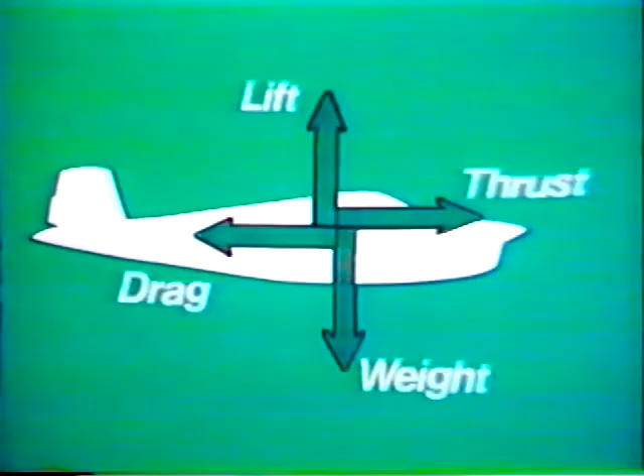In this first tape, I will revisit with you some of the areas you studied when you were first learning to fly. We will discuss the atmosphere, its composition, and its properties of pressure, density, and viscosity. Next, we will examine the 4 forces which act upon an aircraft in flight. We will look at an airfoil, name its parts, and establish terminology important to understanding the generation of lift, such as angle of attack, camber, angle of incidence, and chord line.

The principles and laws of Bernoulli will be explored along with the theory of circulation. As a result of this, the relationships among camber, relative wind, and angle of attack should be well established in your mind.

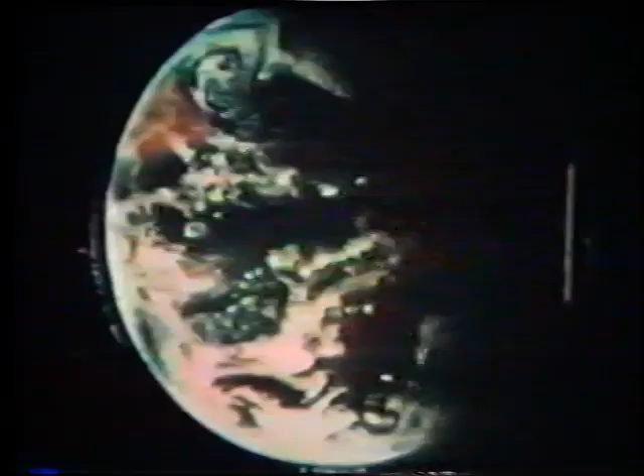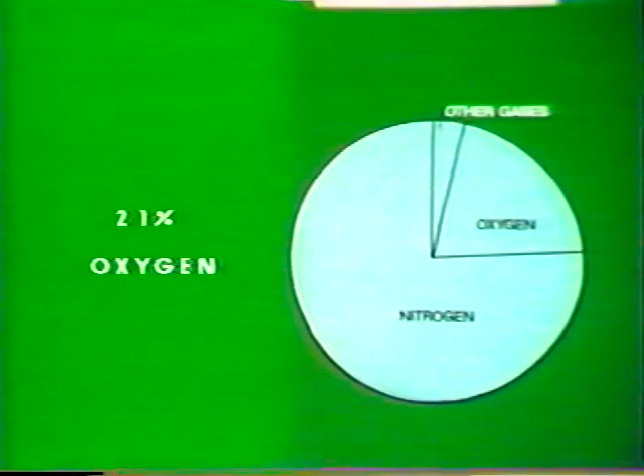Except for scientists who study it or environmentalists concerned about its quality, most people give little thought to the air which surrounds them. But if you're counting on it supporting you immediately after rotation from the runway, you should reacquaint yourself with it. Almost everyone remembers that dry air is 78% nitrogen, 21% oxygen, and 1% other gases. The ratio of these gases remain the same around the world and as high as the atmosphere extends.

Water vapor is also a gas found in the atmosphere. Its quantity may vary, unlike the other gases whose ratio is pretty well constant. It may make up from near 0% of the atmosphere to a maximum of about 5%. As the amount of water vapor increases at a given point, all other gases are reduced proportionately.

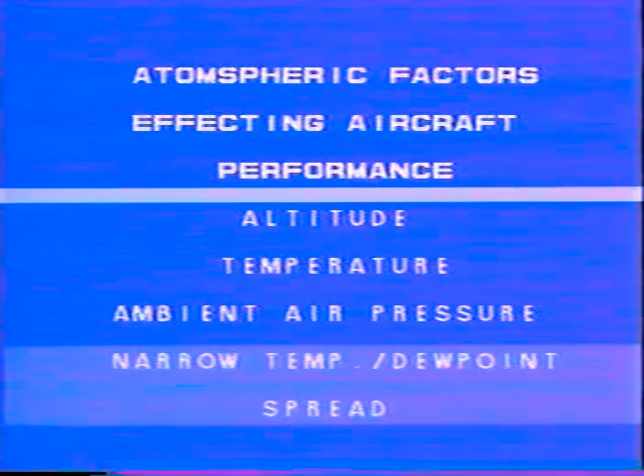Most of us probably know that air is a gas, and as such has all the properties of gases. It has mass and weight. It can exert pressure, and can be compressed or diffused, causing changes in its density. And it offers resistance to objects moving through it. All of these properties are at work when you fly your plane through the atmosphere.

Let's first look at the words static pressure. Remember the 14.7 pounds per square inch you learned in junior high school science? That was supposed to be the normal air pressure. That is static pressure. You probably remember a specific number without any qualifications. However, the figure is an arbitrary one and only pertains to sea level on a, quote, standard day, unquote.

If you went to school in North Platte, Nebraska, the figure that you learned as normal air pressure was about 1.5 pounds per square inch off. Air pressure on a standard day in North Platte is more like 13.2 pounds per square inch.

Static pressure, then, is the force exerted by the weight of the atmosphere pressing down from hundreds of miles in space. It is pressing down because it has mass and is reacting to the pull of gravity. If that is so, why isn't the pressure equal regardless of the altitude? Why does North Platte, at a little over 2,800 feet, have over a pound of pressure less than at sea level? One of the other properties of air helps us to explain it.

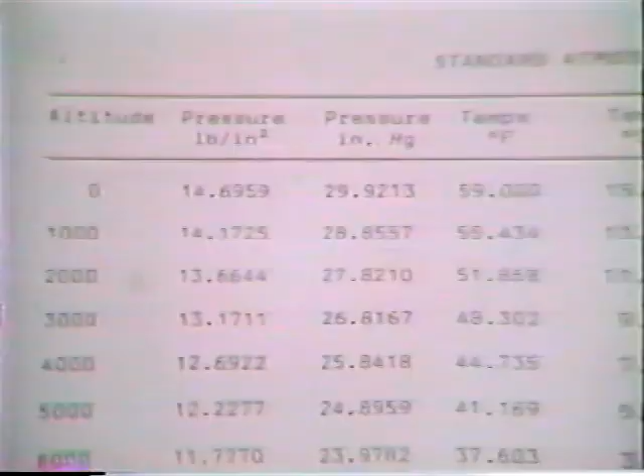Let's take a look at a chart which represents a standard day, one of those we mentioned earlier. This illustration is an excerpt, not the complete chart, which was originally put together by the National Advisory Committee for Aeronautics, the predecessor to NASA. The chart is based on many years of weather observations and has since been confirmed as basically accurate. Its purpose is to provide a common denominator for measuring aircraft performance and a standard upon which to calibrate and correct aircraft instrument readings. This chart will be important when we discuss aircraft performance and instruments.

Before dealing specifically with any one of them, let's take a moment to review the 4 forces acting on an airplane in flight. You know them as thrust, drag, lift, and weight, or gravity as some prefer to call it. The 2 forces constantly trying to bring you to a stop on the ground are drag and gravity. The 2 forces you must produce to overcome these negative forces are thrust and lift. Thrust must overcome drag, and lift must overcome gravity before the plane can get off the ground.

In a stabilized flight condition, such as level flight, climb, or descent at constant velocity, thrust and drag are equal, and lift and weight are equal. The propeller produces a given thrust, but total drag equals that thrust and limits the aircraft's speed. The weight of the plane, plus a little extra aerodynamic weight, is equaled by the lift produced over the wings. In aerodynamics, this stable condition is known as equilibrium.

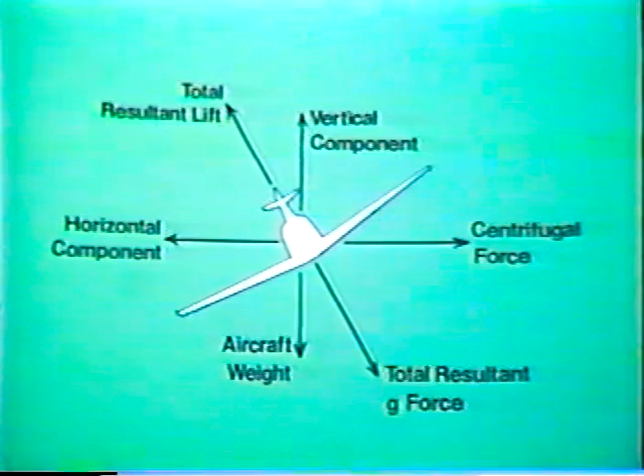Now we come to the big question: what is lift, and how is it produced? Before we get the answer, let's look at some pictures and review some more terms.

An airfoil is any part of the plane shaped so that it responds to air movement by producing differential pressure on either side of the airfoil. The wing, propeller, and empennage are the important airfoils.

Leading and trailing edges of the wings seem pretty obvious, but they do more than just outline the silhouette of a wing. Their location has much to do with the aerodynamics of an airfoil. A line connecting the leading and trailing edges of an airfoil is referred to as the chord line. It should not be thought of as a permanently anchored thing, since it moves as the high lift devices change the shape of the wings. Its position in relation to the relative wind and the longitudinal axis of the aircraft are extremely important.

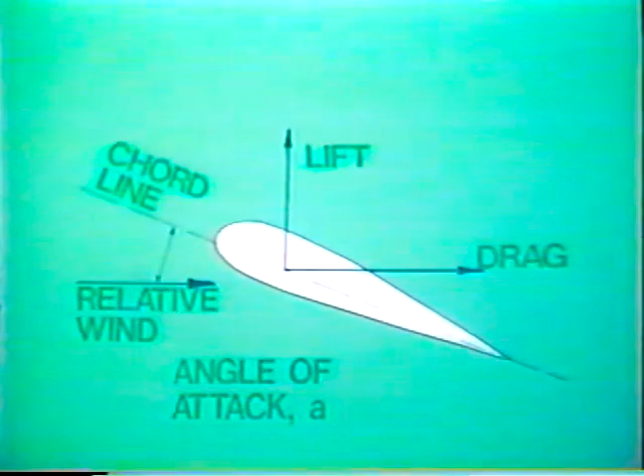Camber means curving or bending. On an airplane, it refers to the curving surfaces. A wing which has identical curvature top and bottom is known as a symmetrical wing. An asymmetrical wing usually has a flatter lower surface with more curvature on top.

Relative wind is the airstream created by the movement of the plane through the air. Most of the time its direction is opposite the flight path of the aircraft, but it may be deflected by gustiness or wind shear. Angle of attack is the angle between the relative wind and the chord line of an airfoil. Increasing the angle of attack will increase lift and also drag. It also determines the point at which a wing will stall. A given wing will always stall at the same angle of attack, regardless of speed or attitude.

It is rare that a manufacturer fits a wing to an airplane so that its chord line is parallel to the longitudinal axis of the plane. In normal cruise flight, they want the fuselage to be parallel to the ground, but it must be able to support maximum gross weight at the same time. Therefore, the wing is set into the plane at what is called the angle of incidence. This provides just enough angle of attack so that the pilot should not have to trim beyond a neutral position.

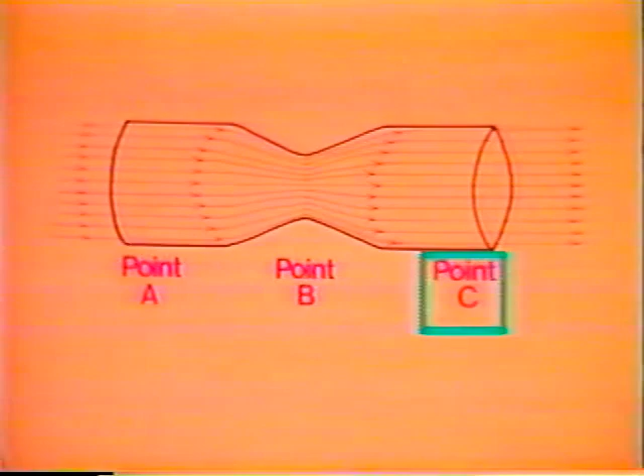The law of the conservation of energy requires that total energy in the tube remain the same. Therefore, we have taken from the potential energy to create some kinetic energy. Since potential energy was represented by static pressure, we have reduced the static pressure by using some of its potential energy to create greater velocity at the restriction at point B. After the airflow passes the restriction at point B, its velocity decreases and the pressure increases. If the velocity at point A and C are the same, then the pressure would be identical.

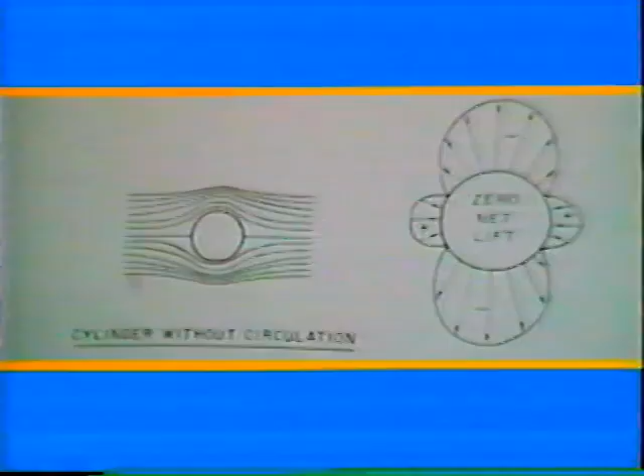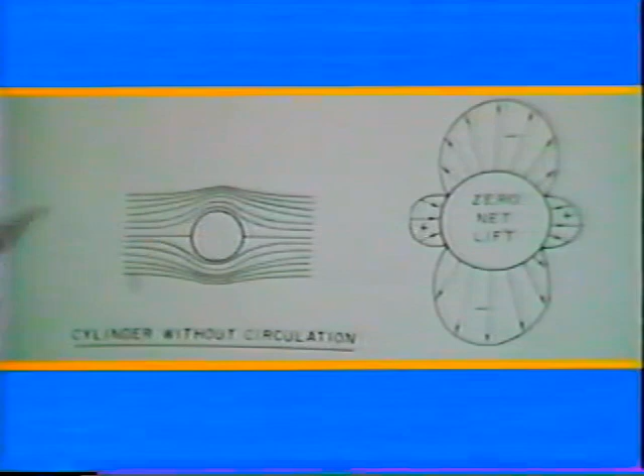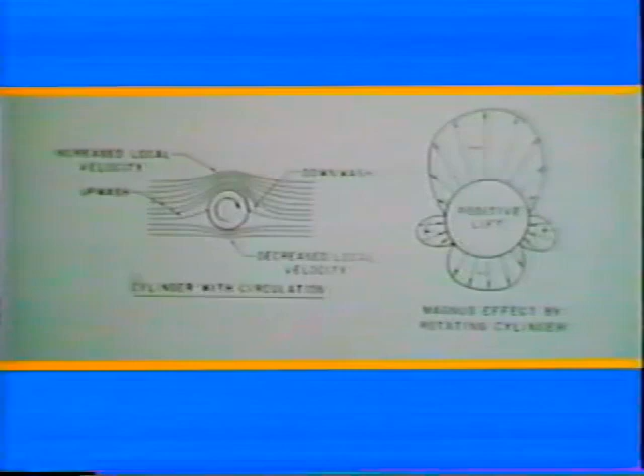Another important concept in the generation of lift is circulation. If you are a baseball fan, you have probably seen its effect on a pitched fastball. Look at this diagram of a cylinder and an airflow. We will ignore density and viscosity at this point. Note the pattern first where the cylinder is stationary, and in the second illustration where the cylinder is rotating. The circulation of the cylinder has produced not only a larger amount of lift on its top side, but it has also produced an upwash ahead of the cylinder and has moved the stagnation points toward the bottom.

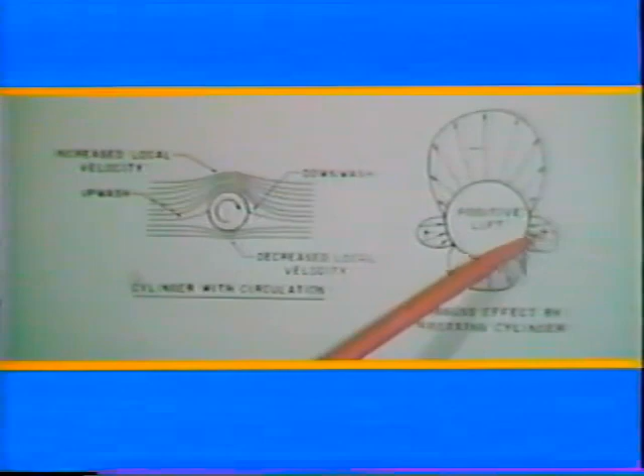There are normally two stagnation points on an airfoil. They occur along the leading and trailing edges of an object placed into an airstream. At the leading edge, where the air separates to go either above or below, a small area exists where there is no air movement. At this point, a stagnation pressure develops, which is the sum of the ambient pressure ahead of the wing and the dynamic pressure around the wing. A similar area occurs along the trailing edge of the airfoil.

Apply this concept to baseball. The pitcher puts some backspin on the ball as he throws. The highest velocity exists over the top of the ball, creating lower pressure there than on the bottom. This lifts the ball. It actually bobs up from the plane in which it was thrown.

And if it's a good fastball, the batter will undercut it completely.

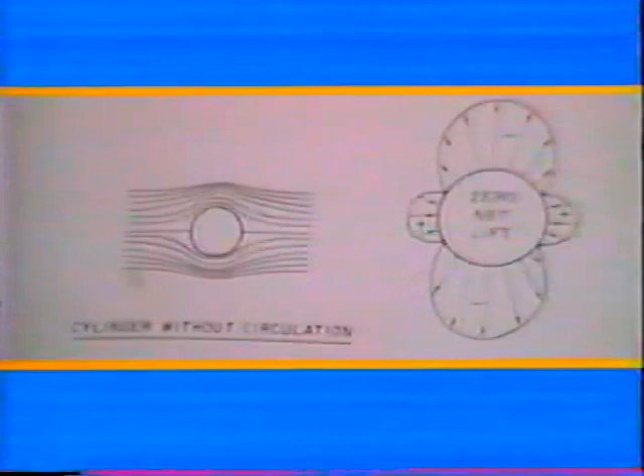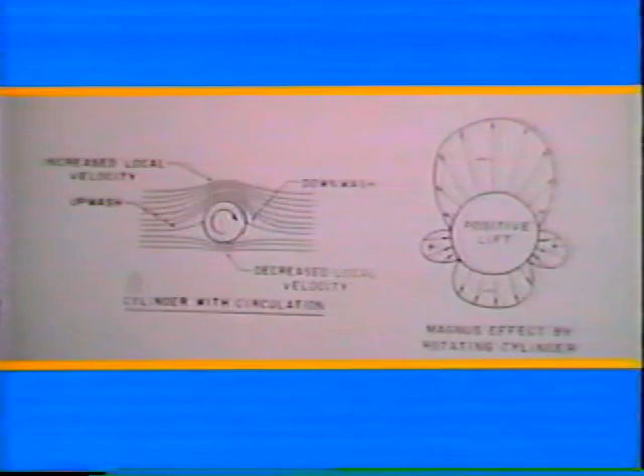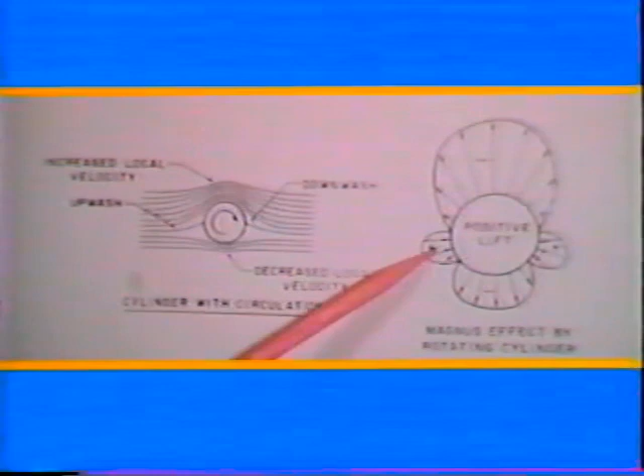Now look at the diagram where the cylinder has been placed in rotation. Lift forces on the top, where velocity is greatest, has increased, while the opposite is true on the bottom. The stagnation points have moved to a lower position. The net result is a positive force acting perpendicular and upward from the cylinder.

The position of stagnation points is of additional importance to you. It is the leading edge stagnation point that has the area where ice formations start. Because of the stagnant air at this point, the ice sometimes develops almost a horn shape, which continues to build out beyond the stagnation area under some circumstances.

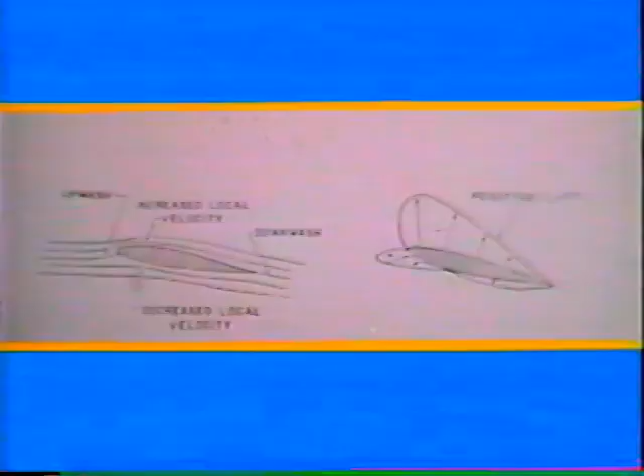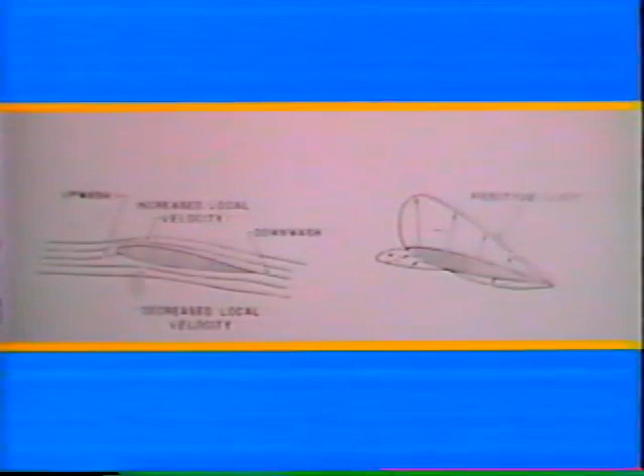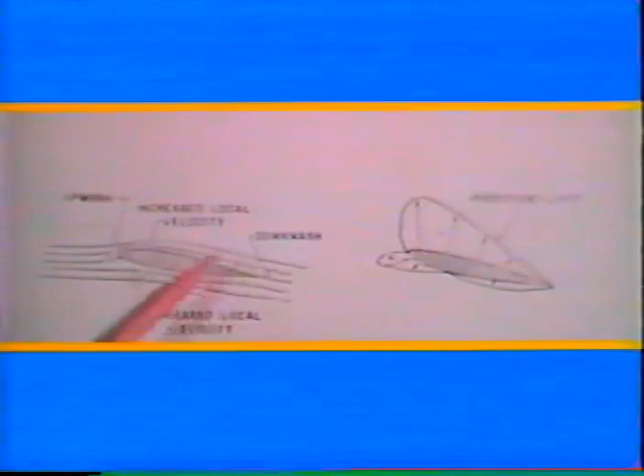The symmetrical airfoil, tilted to a positive angle of attack, shows very similar pressure patterns. Note also the upwash ahead of the airfoil and the downwash behind the trailing edge. The airfoil appears to have the same circulation around it as does the circulating cylinder. This helps explain why velocity of the airstream over the wing accelerates as the wing is placed in motion. It is subject to the same type of circulation.

One more observation deserves our consideration. The symmetrical airfoil at small angles of attack may develop negative air pressure both top and bottom. It will be true, however, that the least pressure will still be on the top of the wing.

It is also true that at high angles of attack, the pressure on the surface will be increased. It will force large quantities of air down in the downwash coming from the airflow over the top of the wing. In this situation, up to one third of the lift force may come from the increase in pressure.

So far, I have presented you with three important concepts on the production of lift. First, the Bernoulli principle utilizes the theory of conservation of energy, and it explains why air placed in motion over an airfoil reduces the pressure.

Second, the theory of circulation helps us to understand why the velocity of air flowing over the wing is greater than that flowing beneath the wing. Third is Newton's third law, which states that there must be a reaction for every action. We know that large quantities of air are forced downward behind the trailing edge of the wing. If we force air downward, the reaction in nature is to force the wing up.

Now that we know why lift is produced over the wing, let's take a look at how engineers determine the amount of force produced by this phenomena. It will involve a mathematical equation, but not one that you should find very intimidating.

The formula for lift looks like this. Lift equals the coefficient of lift times one half of the density times the velocity squared times the wing surface area. All of the items seem obvious except coefficient of lift. This item is an index number representing the ratio between lift pressure and dynamic pressure.

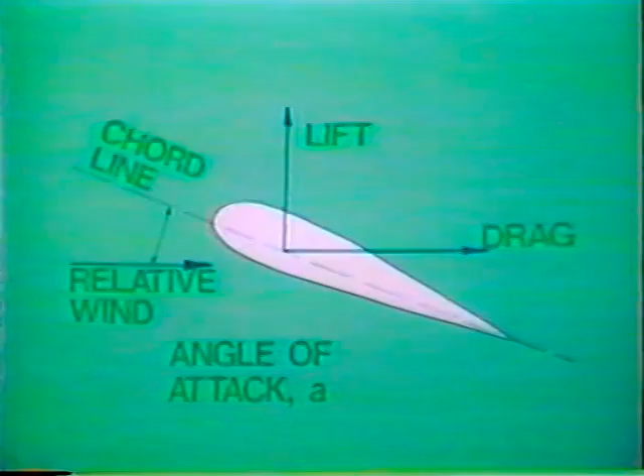It is related to the shape of the wing, and the angle of attack. The maximum lift coefficient for any wing occurs at the point of the stall. We know that a wing will always stall at the same angle of attack. We therefore reach the maximum coefficient and the stall angle of attack at the same time. This has implications for landings and takeoffs.

For illustrative purposes, let's place two aircraft on a runway side by side. All factors are equal except the maximum coefficient of lift. Airplane A has a maximum coefficient of lift of 1.8 with a thick asymmetrical wing, while B has a thin symmetrical wing with a coefficient of 1.0. Which plane will use less runway for its landing and takeoff? It will be the aircraft with the highest maximum coefficient of lift, or in this case, aircraft A.

Now, would it be possible to modify airplane B without changing to another airfoil and be able to equal the landing and takeoff performance of airplane A? Yes, it would. We could cut loose a section of the wing at the trailing edge and hinge it so it would kind of droop down. Why don't we call it a flap?

Since shape is considered in our index, we bend the flap down until we get a camber which will be equal to 1.8 as its maximum coefficient of lift at the maximum angle of attack. Now, we can use the same landing and takeoff figures for both aircraft.

We can retract the flaps while in cruise and have the benefit of a cleaner airfoil with less drag. The lowered coefficient of lift will be compensated for by increased speed.

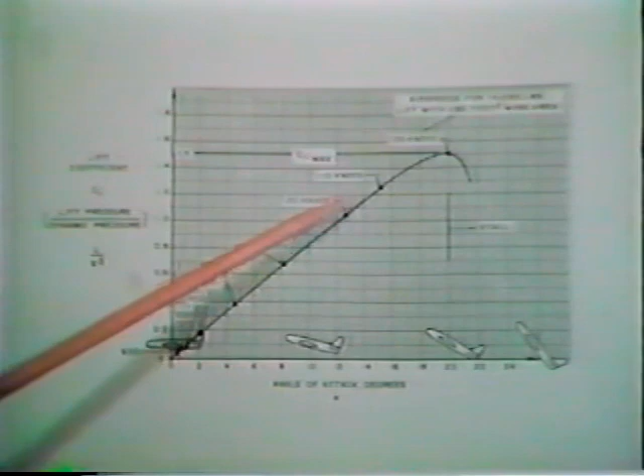This chart was taken from Aerodynamics for Naval Aviators. It shows that the coefficient of lift varies directly with the angle of attack. How is it possible that a diminishing angle of attack and a lower coefficient of lift can keep an aircraft in the air? The answer is your airspeed.

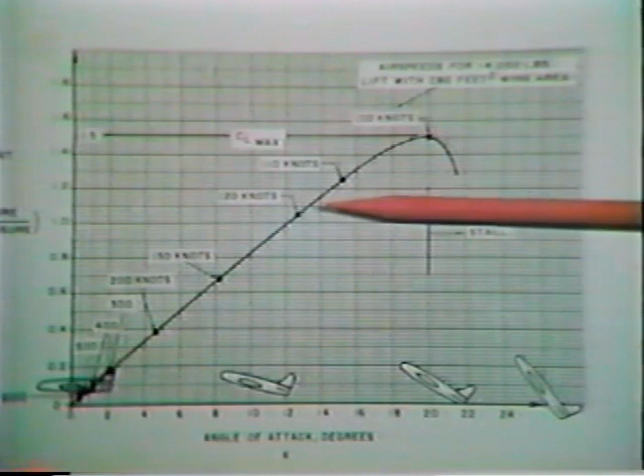Note on the line, which correlates index numbers and angle of attack, that selected airspeeds are also given. You will find that as the angle of attack and the coefficient of lift diminish, the airspeed increases.

Many instructors use this information to demonstrate that control of airspeed is primarily a function of angle of attack. They further claim that power is used to control altitude. Although discussions on this topic have appeared in the journals from time to time, it is well accepted that attitude controls airspeed and power controls altitude.

Well, we ought to regroup here for a moment. We have just determined that there are basically three things which determine how much lift you will get over your wings. They are relative wind, angle of attack, and camber. They are interrelated so that what affects one has an effect on another.

For example, let's take a plane in straight and level flight. If we retarded the throttle and began to lose altitude, you would automatically adjust the angle of attack if you wish to remain in level flight. This would reduce your airspeed, but by increasing the angle of attack, you have increased the coefficient of lift, which gave you the lifting force you need to remain at a given altitude.

There have been many pilots who have lost airplanes because they didn't understand this relationship. Take the full flap go-around as an example. Cleaning up flaps means reducing the coefficient of lift to that of a clean wing. Getting rid of flaps all at once without giving the plane a chance to accelerate and compensate for this loss may mean a stall and loss of altitude at a crucial point.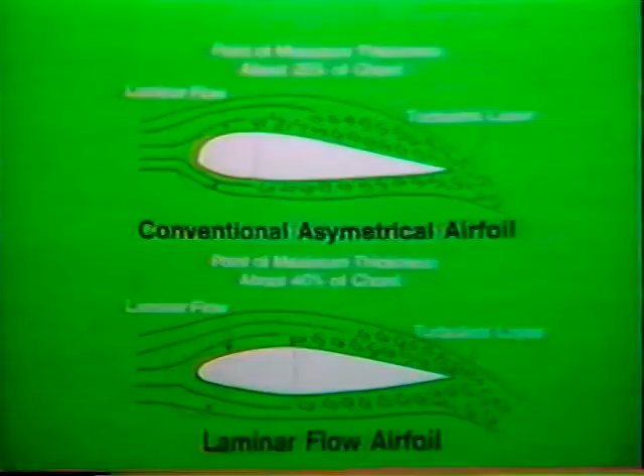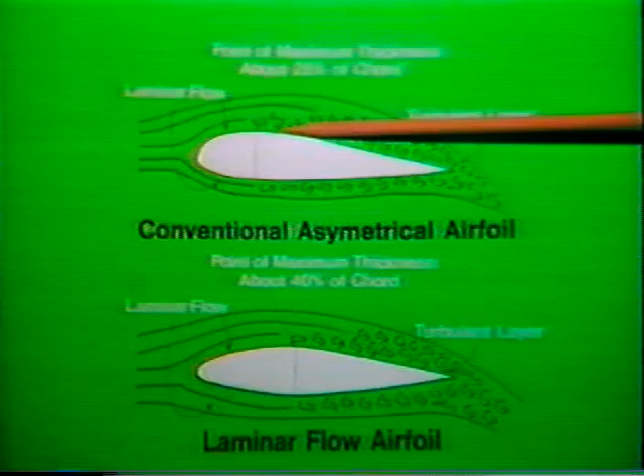Somewhere behind the point of maximum thickness of the camber, the airstream cannot hold to its smooth boundary layer. It becomes turbulent. As long as it has a strong enough velocity, it will remain layered. Stagnation pressure from the trailing edge of the wing is quite powerful. The velocity of the turbulent layer diminishes as it nears the trailing edge, and the airflow along the wing may actually reverse direction due to the trailing edge stagnation pressure.

What would cause the turbulent layer to lose velocity? When the angle of attack is increased, it becomes more difficult for the boundary layer to cling. The circulation effect produces an upwash at too great an angle over the leading edge. This allows the turbulence layer to spread toward the leading edge. Because it is turbulent, its velocity is decreased, and the trailing edge stagnation pressure amplifies the airflow separation.

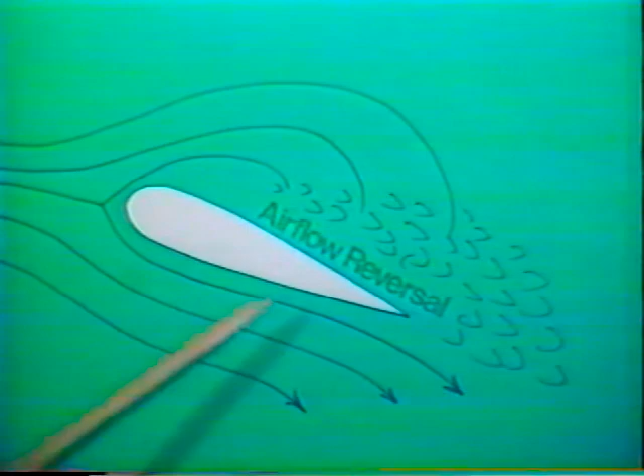At the stall angle of attack, this separation is complete. All you have left to keep you in the air is the downward deflection of the air from the bottom of the wing.

Unfortunately, some training manuals leave you with just the images of the wing sections and their airflow patterns. Well, a wing just doesn't behave that way most of the time.

First, it is designed so that its stall pattern follows a known progression. A well-designed wing will stall first at the trailing edge near the wing root. Except for T-tail aircraft, this places the tail surfaces in turbulent downwash, which produces the buffeting that is your warning of an impending stall. It also leaves the tips to stall last, giving some degree of aileron control up to complete stall, and helps prevent nasty wing drops that could happen if the tips stalled first. Your wing may still be flying when the stall breaks.

The reason the nose falls through the horizon with suddenness is that there is a complete stall close to the fuselage, which eliminates the downwash over the horizontal stabilizer. Your plane depends on that downforce to balance a nose-down pitch built into it at the factory. With the tail force gone, the pitch force takes over and drops the nose.

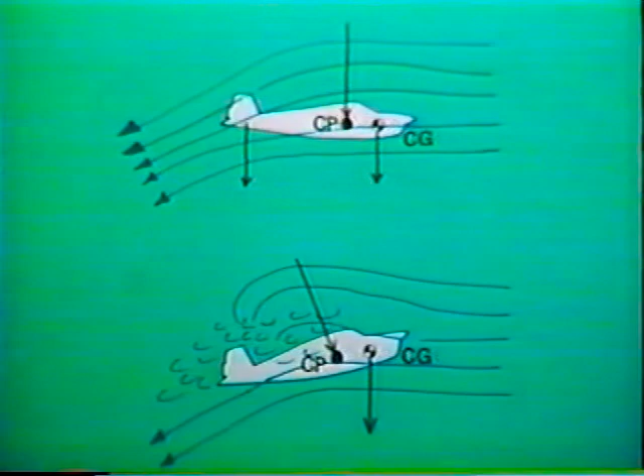By stalling the wing root area first and having the stall progress outward from the fuselage, the pilot is given a warning of an impending stall. The nose will automatically pitch downward toward recovery, and aileron control will exist well into the stall, but not after a complete stall.

The way designers get the wing root to stall first is usually to twist the wing by giving it a smaller angle of incidence at the tip than at the root. It's only a matter of a couple degrees, but it does the job. It's also possible that the airfoil near the tip is a different shape than the airfoil in the main wing section. If the coefficient of lift is higher at the tips, the tips will remain flying after the main wing has stalled.

Another technique for inducing root stall first is to place a small triangular strip on the leading edge near the wing root. At high angles of attack, these strips disrupt the smooth airflow over the wing enough to induce early airflow separation and initiate the stall at that point.

A point worth repeating concerning stalls is that they can occur in any aircraft attitude and at any airspeed. A snap roll at the top of a loop when the plane is inverted is a stall maneuver. High-altitude aircraft cruising just under Mach 1 have stalled in clear air and fallen thousands of feet before recovery.

The angle of attack at which a given airplane will stall is always the same. Your stall warning device is set to trigger at a few degrees below the stall angle of attack. Remember that the next time you make a tight turn from base onto final, believing that just a little extra airspeed will compensate for the higher angle of attack needed to support the airplane.

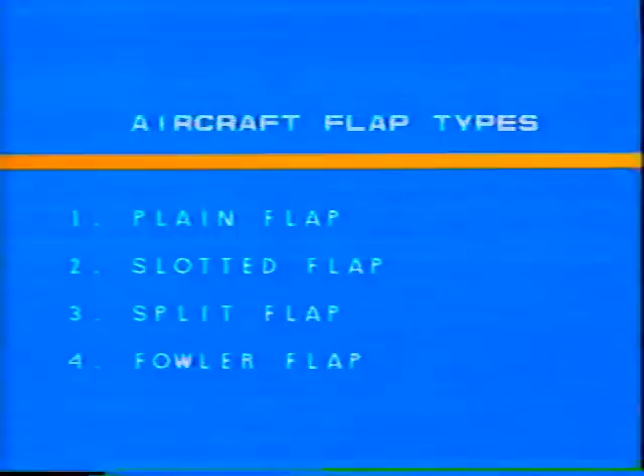Modern aircraft are equipped with any of four types of flaps: the plain flap, slotted flap, split flap, and Fowler flap. Their primary purpose is to allow for steeper landing approaches by increasing the coefficients of lift and drag.

Many general aviation aircraft use a version of the plain flap, which is essentially a section of the trailing edge which can droop to, say, around 40 degrees.

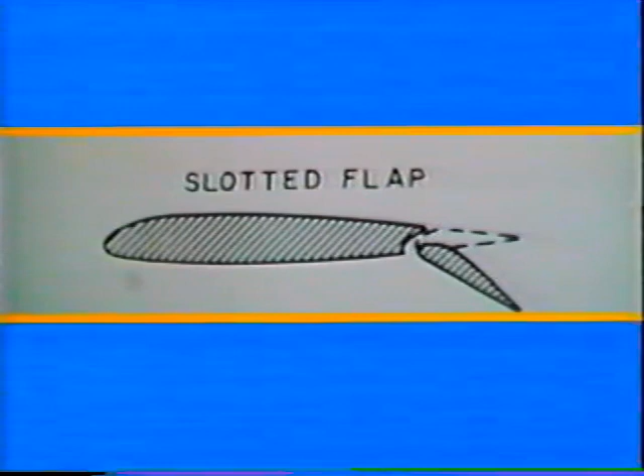The slotted flap is related to the plain flap. The difference is that the flap is pushed back away from the wing as it comes down. This allows high-energy air from below the wing to be ducted over the flap. The renewed airstream gives the boundary layer the velocity needed to delay airflow separation longer, which increases the coefficient of lift even more. A close look at a Cessna high-wing airplane will give you a good picture of this type of flap.

The flap used on the Gooney Bird, the legendary DC-3, is called a split flap. In this type, just the lower surface of the wing droops down instead of the entire trailing edge section. Its coefficient of lift is slightly better than the plain flap, but it produces great quantities of drag.

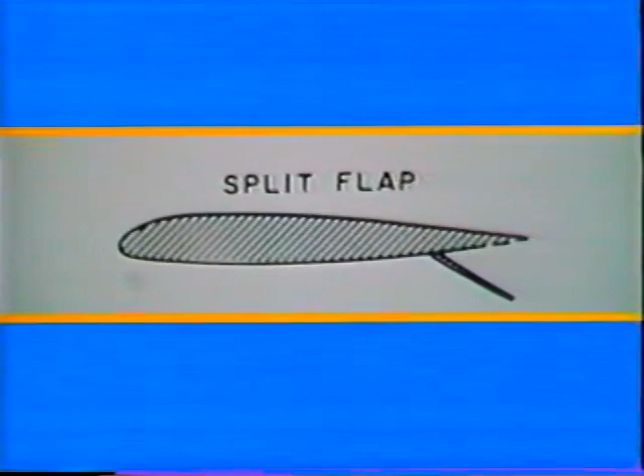The Fowler flap not only droops to change the camber, it also uses a portion of the undersurface of the wing to increase wing area by sliding it aft as it is lowered. The total wing surface is one of the prime factors in the lift formula. A flap which can increase the coefficient of lift and at the same time increase wing area will greatly add to the lifting force. That is what the Fowler flap does. However, it needs a complicated mechanism and some pretty heavy hardware, which makes it expensive to install on the average general aviation airplane.

High-performance aircraft will often include lifting devices on the leading edges as well as the trailing edges. Here's why: earlier, we discussed how the boundary layer converted to a turbulence layer slightly aft of the point of maximum wing thickness. With flaps down, the turbulence layer tends to separate from the surface more readily. The boundary layer needs a dynamic shot in the arm.

That shot is provided by opening a contoured slot along the leading edge of the wing, which allows the boundary layer to pick up enough momentum to delay the onset of the turbulence layer, improving the coefficient of lift. The movable slat is the most common leading edge high lift device. It is either automatically operated by the airflow or operated manually by the pilot. In addition to allowing for smoother airflow over the wings, these leading edge slats or flaps also change the camber of the wing and improve the coefficient of lift.

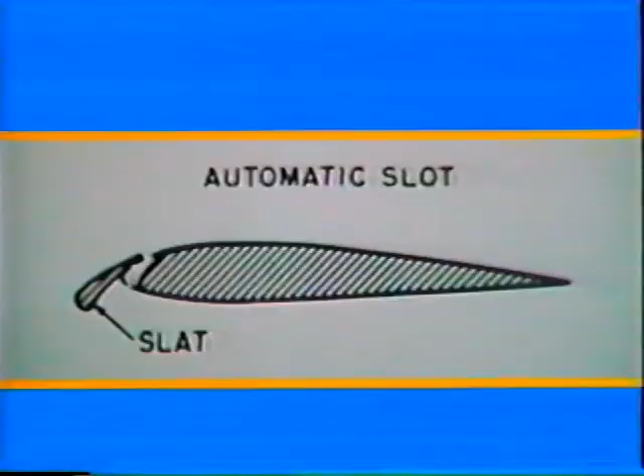It was the automatic retraction of the leading edge slats on the left wing of the DC-10 in Chicago which caused the wing to stall, rolling the aircraft out of control.

Experimentation continues with devices designed to control the boundary layer for the full width of the wing. The engineers have been quite successful with boundary layer control, but have yet to figure out how to eliminate the miles of plumbing necessary to make it work. The two major systems either bleed air from the surface through hundreds of tiny holes to a suction pump, or force air through the holes from the compressor section of the engine. Either way provides the aircraft with a new, higher stalling angle of attack. Although results have been good, the cost-benefit ratios have not yet been positive enough to put it into production models.

We have now scratched the surface of aerodynamics by helping you understand perhaps a little better the concept we call lift. We know it is a direct product of properties and conditions which prevail in the atmosphere. Static and dynamic pressure, density and viscosity of the air around us determine conditions for the production of lift.

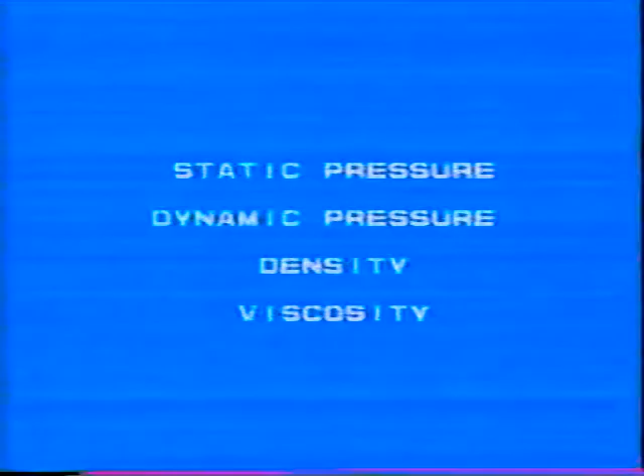We have dissected a cross-section of the wing and named its parts: leading and trailing edges and chord line. We have defined and differentiated between angle of incidence and angle of attack. We discovered how a wing produces lift by examining the theories of Bernoulli, dealing with the conservation of energy, of Newton, dealing with action and reaction, and the theory of circulation, explaining increased velocity over the wing.

We discussed relative wind, camber, and angle of attack. Stalls were revisited and expanded upon. Finally, we discussed high lift devices and how they affected the production of lift.

Generating lift over the wing of an airplane would be simple if we could stop right here. However, we have already gotten involved with drag on several occasions, and drag deserves some time of its own. So right now we will terminate our present discussion.

To continue with us in this airmanship series of tapes on aerodynamics, you should go next to the tape entitled The Development of Drag.

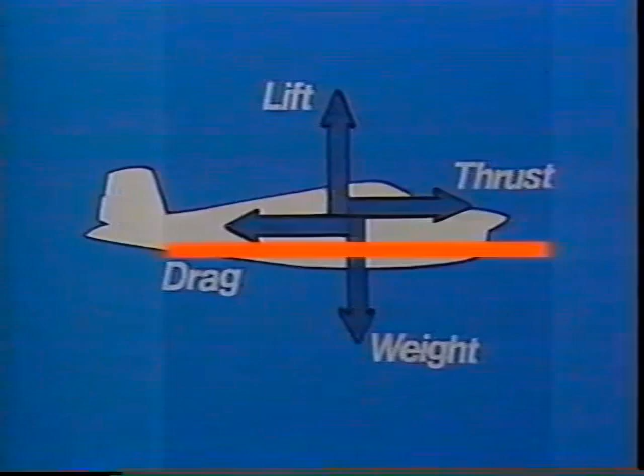Now, we all know drag opposes thrust. It goes to work as soon as the air starts to move the airframe. It's always with us as we fly, and we even make good use of it at times. As pilots, we can't do anything about most of it, but we do have some control over one type.

Most of us learned that there are two types of drag. They are parasite drag and induced drag. You buy parasite drag with the airplane. Its design and general condition will determine how much there will be. Induced drag is a product of lift, and this is where you can exert the most control.

I will take up parasite drag with you first, and we will see what we can do to keep it to a minimum. It has several subdivisions, which we will look at one at a time. They are form, skin friction, interference, separation, pressure field, power plant, and wing section profile.

Form or flat plate drag is sometimes referred to as the barn door effect. It is created by the total frontal area of the plane and includes not only the fuselage, but gear, struts, wires, and antenna as well. Many ultralights have large quantities of form drag, part of which is the human body hanging below the wings.

Skin friction drag is created by the rubbing of the air molecules against the total exposed surface of the plane. It is directly proportional to the amount of surface and the roughness of the surface. Many home-built planes made of composite materials can be rubbed to a super smooth finish, thereby eliminating a good chunk of skin friction drag.

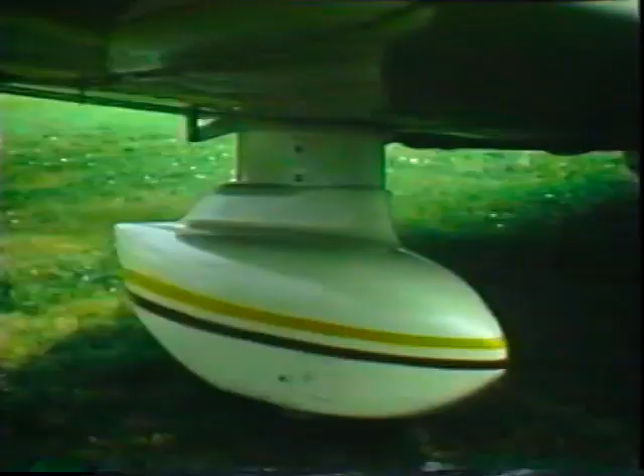There is a tendency for the airflow to break down and separate wherever an appendage meets the fuselage. This creates what engineers call interference drag. Some of this type of drag can be eliminated by placing streamlined fairing where the wings, landing gear, struts, etc. meet the fuselage.

Separation drag is interference drag in that it is the result of design problems. It may occur wherever there is an abrupt contour change in the fuselage shape. The switch from the straight razorback fuselage to bubble canopy on some World War II fighters, such as the Spitfire, P-47, and P-51, caused a breakdown over and around the tail surfaces, necessitating the addition of a dorsal fin ahead of the regular vertical fin. While the dorsal fin did not totally compensate for drag, it did restore directional stability.

Whistling doors are a clue to the fact that you may have what could be referred to as pressure field drag. It occurs around leaky doors, cowlings, and all control surfaces. You can install new door seals and tighten up cowlings, but the leakage around the control surface is a design problem that modification or redesigning may take care of.

Power plant drag consists of the energy used in cooling the cylinders, providing ram air to the carburetor, and driving accessories. Cowl flaps allow for adequate cooling during ground operation and high horsepower maneuvers, but are closed in cruise to eliminate some of the power plant drag.

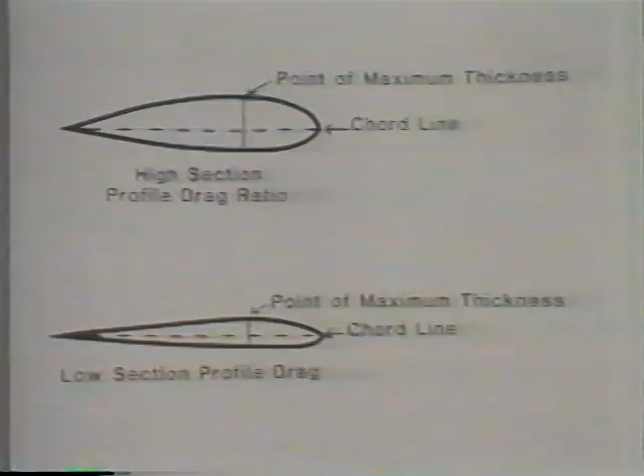In selecting the airfoils which will be used on a particular aircraft, the engineers must be concerned with wing section profile drag. Section profile means that the airfoil shapes taken from cross-sections of the wing at various stations are being considered. The designer must consider such things as the ratio of maximum thickness to chord, at what point along the chord the maximum thickness will occur, and what kind of curves will be used. This information is important in determining the coefficient of lift, as well as the section profile drag.

The ideal airfoil section would have a high coefficient of lift with a low profile section drag. Since this is an impossible design to come up with, every section airfoil is a compromise. It's further compromised by other considerations such as the thickness of the main spar and whether flaps or ailerons will be part of that airfoil. In summary, wing section profile drag is extremely important to the aircraft designer in establishing the efficiency of the wing for a particular aircraft.

Total drag consists of all these parasite drags plus induced drag. Your control over parasite drag consists mainly of keeping your plane clean and waxed and sealed up tight. You do have some control over induced drag, so let's talk about that.

Placing a wing in motion produces both lift and induced drag. It's like having a date with Siamese twins. If you take one, you have to take the other, regardless of how ugly the other one might be. We look at lift as being the desired twin and drag the ugly one. I'm sure you've heard an unpleasant date partner described as a drag, but we know that one must look deeper than the epidermis to discover all the qualities of a person. Maybe we can apply this to induced drag as well.

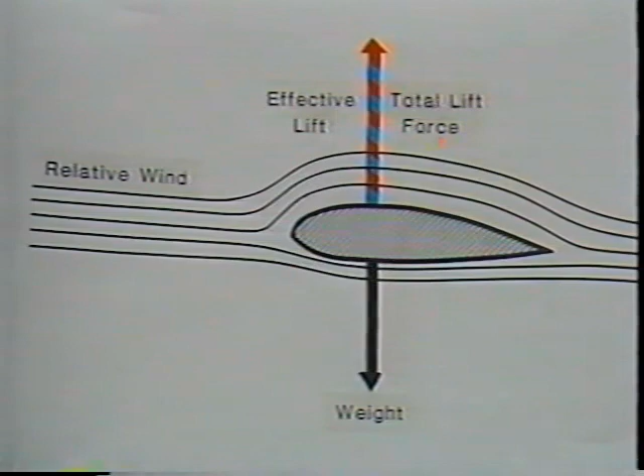In diagram 1, we show a hypothetical situation of level flight with a neutral angle of attack and an asymmetrical airfoil. In order to remain level, lift must equal weight. The lifting force opposing weight we will call effective lift. It is blue in color. In this situation, the effective lift is equal to the total lifting force of the wing. Total lifting force is red.

Before we go to diagram 2, a word about average relative wind. In basic aerodynamics, you learn that wind is always opposite and parallel to the path of the plane. This is true of the main airframe, but not always true of the wings. A moment ago, I mentioned the circulation theory and pointed out how air sweeps up ahead of the wing and produces a downwash behind it. The circulation of air creates a slightly different relative wind for the wings, which is usually inclined upward from the path of the plane. As the angle of attack increases, so does this average relative wind.

You have been told that your plane will always stall at the same angle of attack. As you demonstrate a stall on your next biennial flight review, observe the angle made between your wing chord line and the horizon. You know your wing is supposed to stall at maybe 18 degrees, but you are observing 30 degrees. This is because the wing's average relative wind is at a much higher angle than the relative wind for the plane as a whole.

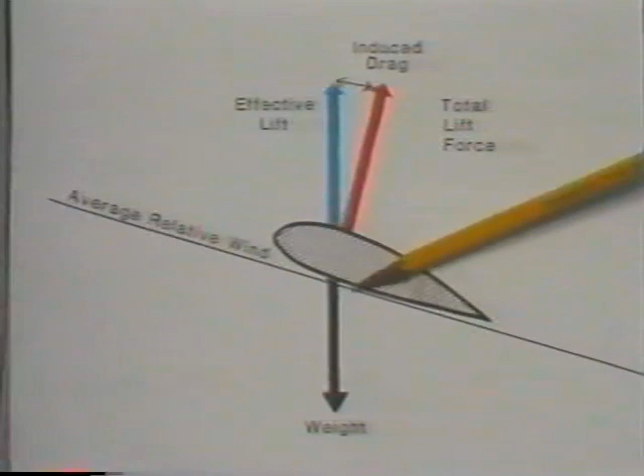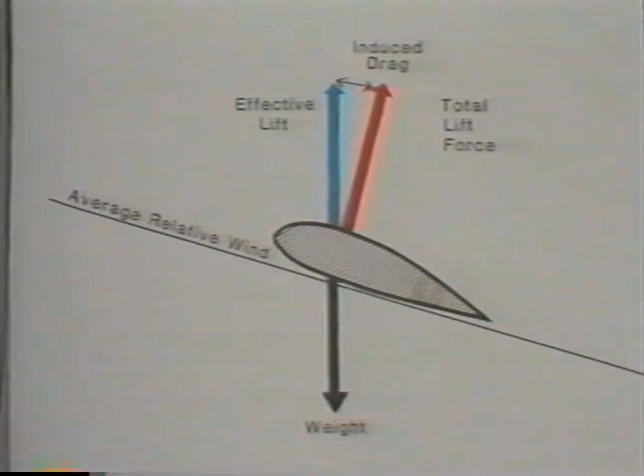It is now inclined aft and has become greater than the effective lift. The significance of this is that some of the total lift force is now acting toward the rear. It is opposing thrust, so it must be classified as drag, induced drag to be specific.

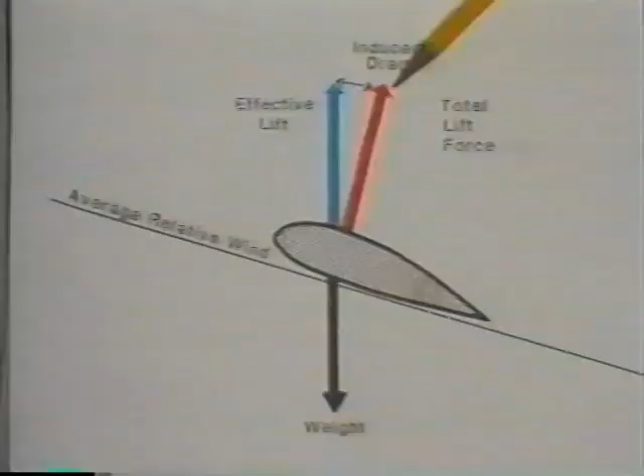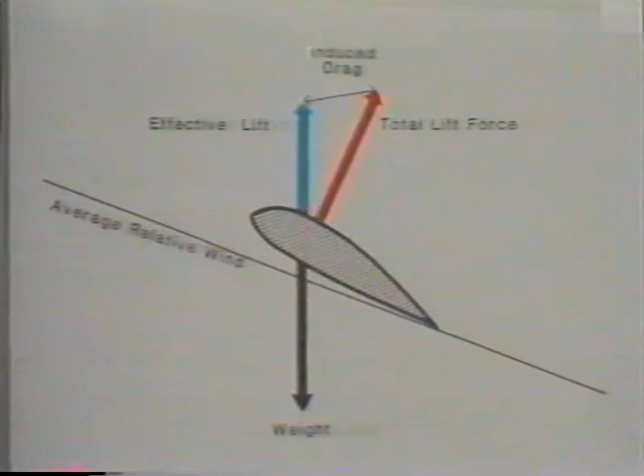How much induced drag is being produced in this instance? We can find that by measuring the distance between the tips of the red and blue arrows. In diagram 3, we have further increased the angle of attack and the average relative wind. Note that the total lift force is at a much larger angle to the effective lift vector and is longer. This situation produces more space between the arrow tips, indicating greater induced drag.

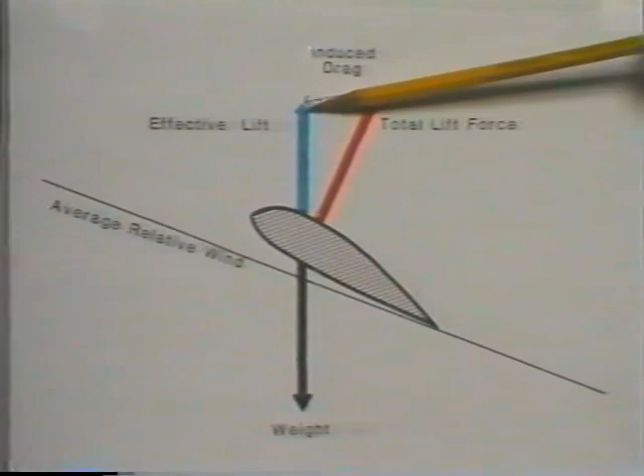Although it may not be completely obvious from our diagrams, the conclusion is that induced drag not only increases with an increased angle of attack, but it also increases at a greater rate than the angle of attack.

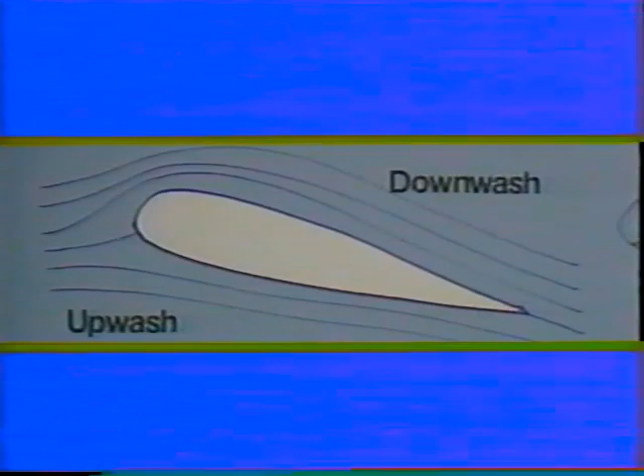This is the diagram we used, and you can see that the relative wind for the aircraft sweeps up just before it gets to the leading edge of the wing. As it passes over the wing, a downwash develops and continues behind the trailing edge of the wing. We're not through with induced drag just yet.

So far we have dealt only with idealized cross-sectional diagrams of wings. If we put the whole wing together, we will see that the dynamic air does not seem to follow as simplistic a path as in the previous diagrams. The air currents flowing over the wing will take a diagonal path leading toward the fuselage. The currents under the wing will move diagonally toward the tips.

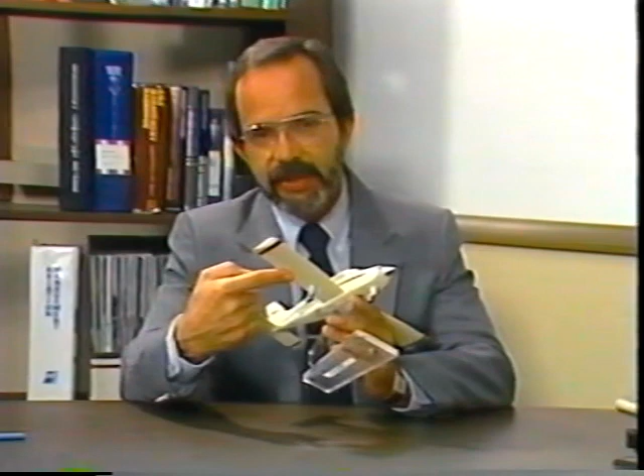Why is this so? It is the nature of liquids and gases to try to fill in any weak spots or holes. We know that the area over the top of the wing has something less than the ambient air pressure. We also know that the air pressure beneath the wing is a bit greater than ambient air pressure, and the higher pressure will try to fill in the area of the lower pressure. Since the wing blocks the passage except for the tips, there is a movement along the bottom of the wing toward the tip.

Once there, the air spills up and over, creating a vortex which trails behind and below the tip of the wing. The curling of the air currents over the wing at the tips produces a force which causes the air to be deflected toward the wing roots on the upper surface of the wing.

All wings presently flying have tips which produce some amount of vortex. In a vortex, the downwash is greater than the upwash. This situation creates a higher induced angle of attack, which in turn creates higher induced drag. The heavier an aircraft becomes, the slower it flies, the greater the vortex becomes. This means that induced drag is greatest as your plane approaches its level flight stall speed.

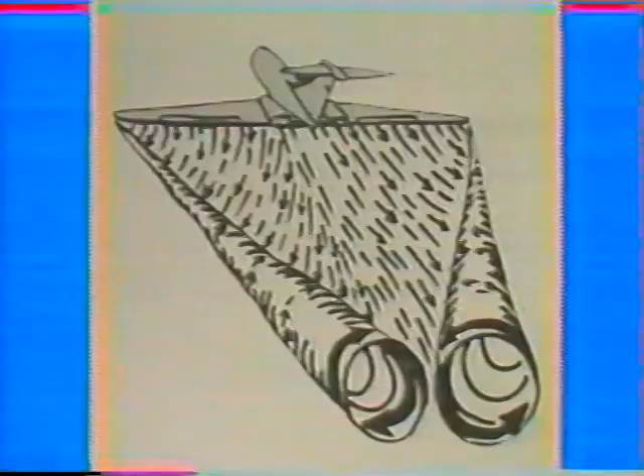From your first lesson to your last approach, you have been continually warned to be alert for wake turbulence. Right now you can probably visualize those twin tornadoes trailing from the tips of a 747. They will drop 800 or 900 feet, level off, and begin to spread apart.

Perhaps you have been warned about the big planes so much that you aren't prone to visualize these same tornadoes streaming from a King Air, a C-130, or a Cessna 210. Wake turbulence is generated by all winged aircraft in flight, including helicopters. A good rule to follow is, big and slow, don't fly below.

The most successful attempt to reduce vortices and induced drag is the winglet. It was developed originally by NASA and has been utilized by several manufacturers. The effect of a winglet is like an extension to the wing, which increases aspect ratio. A higher aspect ratio diminishes the vortices but does not eliminate them. A diminished vortex results in reduced induced drag.

If a designer can reduce the tip vortex, he would lower the wing's average angle of attack, thereby reducing induced drag. There is a way to do this. It lies within the ratio of the wingspan and its chord and is called the aspect ratio. The aspect ratio for a rectangular wing, similar to the ones on many general aviation aircraft, is found by dividing the wingspan by the average chord. A high number would indicate a long, narrow wing, such as those used on high-performance sailplanes.

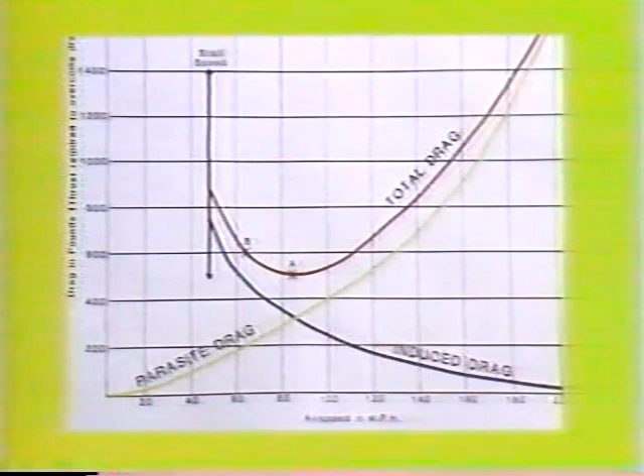In interpreting this graph, if we assume the aircraft is producing lift equal to 1g, or the weight of the plane, the lowest point, point A on the total drag curve, would give the least amount of drag relative to lift. This point gives the highest lift-to-drag ratio. The airspeed at the point where induced drag and parasite drag are equal will give this plane its maximum range and also its maximum power-off gliding range.

The maximum lift-to-drag ratio for a given aircraft is established at a fixed angle of attack. On your airplane, maximum range would occur if you always flew at the same angle of attack regardless of weight. However, weight will vary, so something must give, and that is airspeed. For maximum range, you would maintain an angle of attack and decrease airspeed as fuel burned off and lightened the aircraft. If you were flying a single-engine aircraft 10,000 feet above the surface and had a power failure, how far would you be able to glide before landing?

The answer lies with the angle of attack which will produce the highest lift-to-drag number. For a hypothetical airplane, a given angle of attack could produce a lift-to-drag number of 10. This is a glide ratio of 10 to 1. You could glide almost 20 miles from that altitude, provided you maintain proper angle of attack.

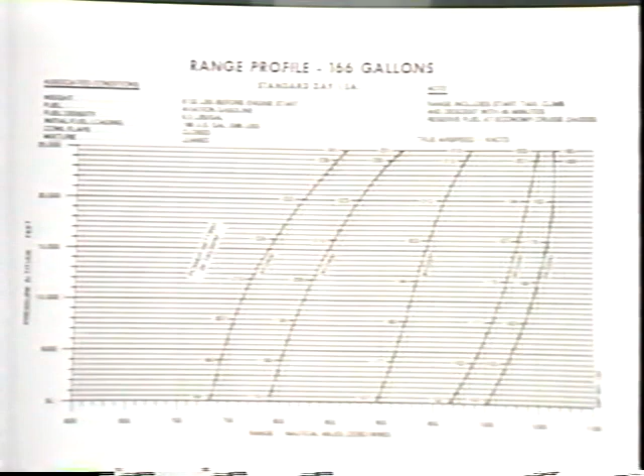Your airspeed would depend upon the weight of the plane. The trouble with this idea is that we don't have a good, inexpensive angle of attack indicator. You don't ever know what the angle of attack is at a given time. The best substitute is a chart giving the lift-to-drag numbers at various airspeeds and weights. Most aircraft operating manuals will give range charts or graphs in the performance section.

Although they seldom mention the lift-to-drag numbers, the charts are based on calculations from the lift-to-drag ratios. There are a couple of other figures which you can obtain from a chart of the drag curve.

A plane's range and endurance are not the same. By slowing the airspeed further, you can keep the plane in the air longer. A rule of thumb: if you know the maximum range and maximum gliding range airspeeds of your plane, calculate 75% of that figure. You now have the maximum endurance speed. It's pretty slow, but it will keep you in the air longer, if time is more important than distance.

No one is going to give you a medal for the most turns made in a holding pattern. The maximum endurance airspeed is at a point where induced drag is creating 75% of the total drag. Keep in mind that it is really a specific angle of attack rather than an airspeed, but for lack of anything better, we must go with airspeed.

One more thing about the airspeed for maximum endurance: it is also the airspeed which will give you the least power-off sink rate. So for a forced landing due to engine trouble, if your chosen field is under you, you may want the slower speed to give more time for communications and setting the plane up for landing. Certainly you would want to consider minimum sink on a night forced landing.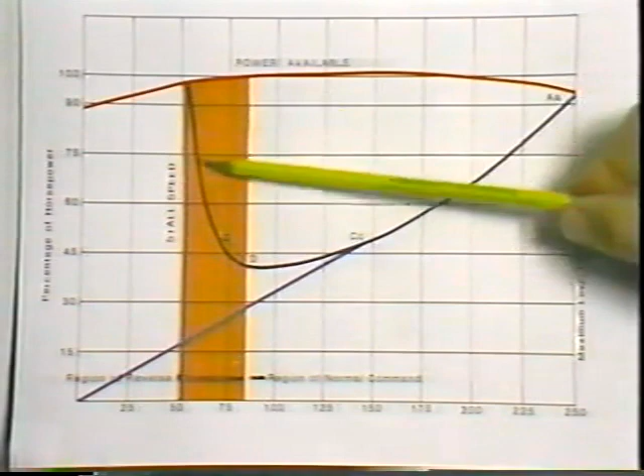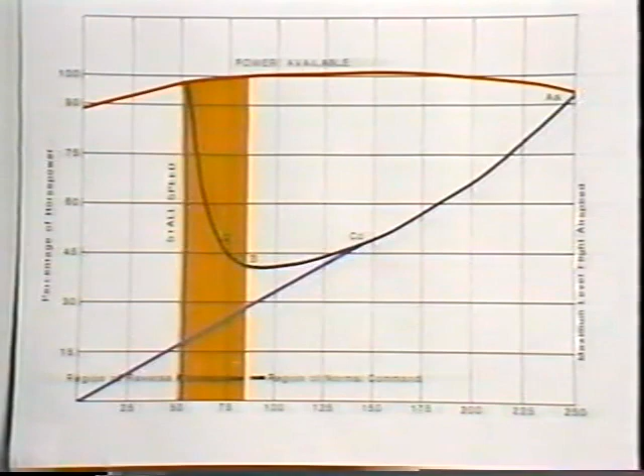That is only natural, since thrust equals drag in order to maintain a given airspeed. However, thrust and power are not quite synonymous. Power is the work turned out by the engine, which it transmits to the propeller, which in turn converts the energy to thrust. In the process, there is some loss of energy, especially at the extremes of airspeed. This is indicated by the power available curve near the top of the chart.

The horizontal lines represent percent of brake horsepower, and the vertical lines represent indicated airspeed. The curve begins on the left at the stall speed and ends on the right at the end of the power available line. To the right of the vertical line, through point D, is the region of normal command, or what we call the front side of the power curve.

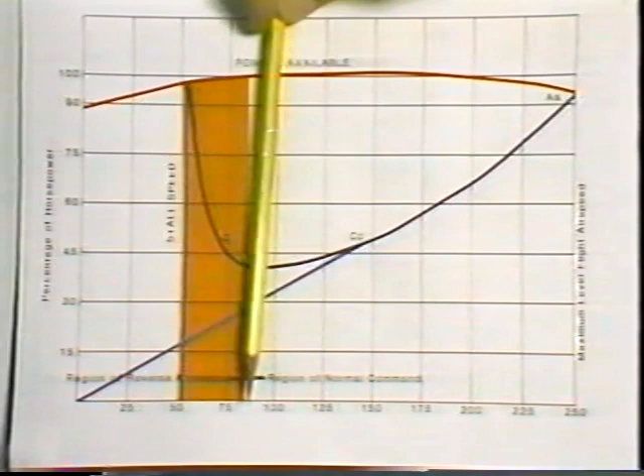To the left of the vertical line is the region of reverse command, or the back side of the power curve. Consider point D first. It is located at the lowest point of the curve, where the power requirement and consequently fuel consumption are at a minimum. This point represents the requirements for maximum endurance and minimum sink glide. At this point, any change in the angle of attack will produce a loss of altitude if power is constant.

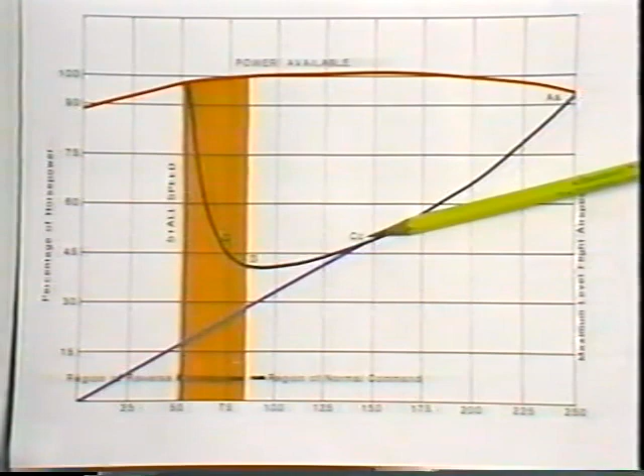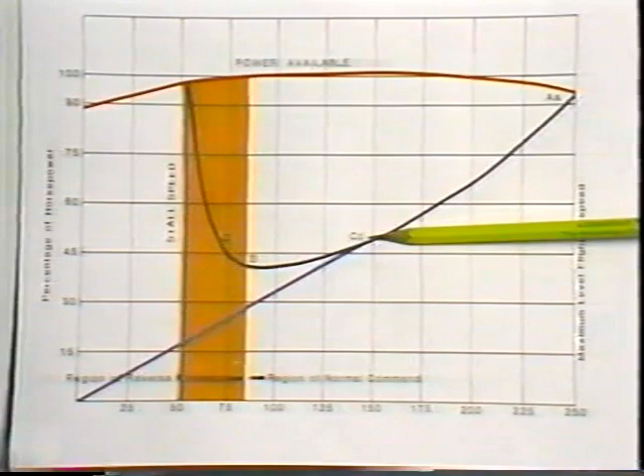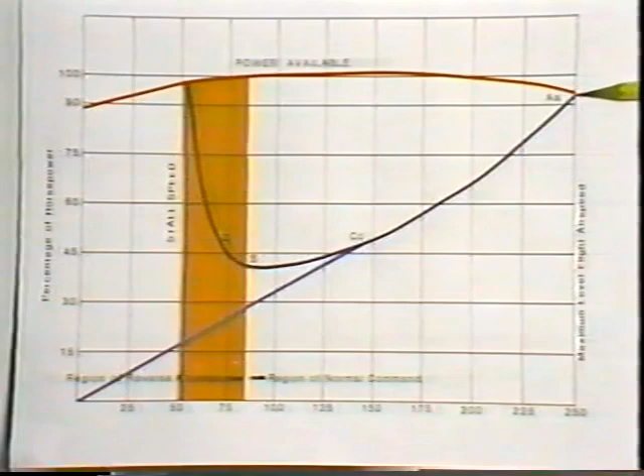Point CC is located at the place where a line from the origin of the graph touches the curve as a tangent. This represents the maximum range and maximum gliding range requirements. The significance of this location is that there is a large increase in airspeed at only a slight increase in the power required. At point AA, the pilot is using full power available to maintain maximum airspeed.

As at point D, any change in angle of attack will cause a loss in altitude. There is no more power to compensate for a higher angle of attack, so the plane will descend. Lowering the angle of attack will give you increased airspeed, but it will come at the expense of altitude. At any point on the front side of the curve, an increased angle of attack will slow the aircraft and it will climb. A decreased angle of attack will increase speed and cause a loss of altitude.

This is what you expect as you fly, and this is why it's called the region of normal command. You will note that for every power setting necessary to maintain a given airspeed on the front side of the power curve, there is an identical power setting required to maintain a much lower airspeed on the back side of the power curve. It is a fact that while in the region of reverse command, the slower you fly, the more power it takes to maintain altitude.

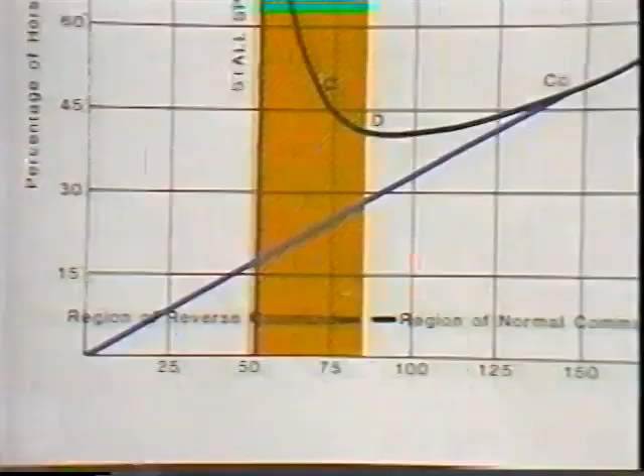This is due to the power of induced drag while the wing is at high angles of attack. Let us assume that the airplane at point C is on a long, power-on final in a busy traffic pattern at an airport with training activities. His airspeed is 73 and he is using 50% of power.

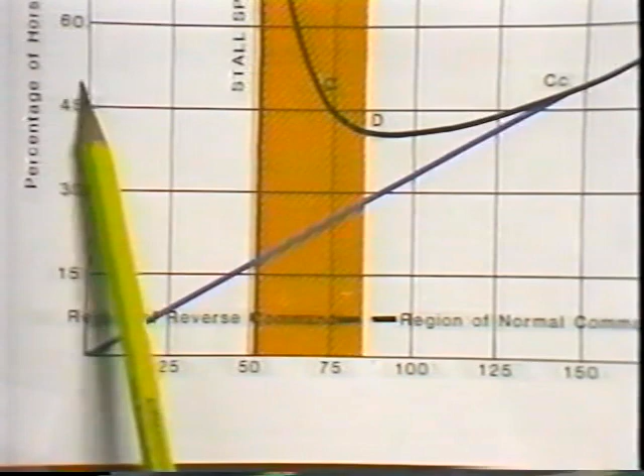Any nudge from his current angle of attack will produce results reversed from normal. Let's suppose this pilot lets the nose drop a little due to some gustiness close to the ground. The airspeed will pick up, but the aircraft's inherent stability will not automatically correct for the extra speed. Unless the throttle is retarded, the plane will momentarily retain the additional airspeed and will climb. Climb with the nose down? That is correct. Remember, we are now in the region of reverse command.

Now, let's try to put it another way. The nose of the plane eases up a bit. The airspeed slows a bit, and the plane begins to sink. The pilot raises the nose a little more and adds some power to regain his approach speed of 73. At this point, 73 is no longer enough.

The increased angle of attack has added a large amount of induced drag, which is acting just like a drag chute. The only cure at this point is a lot of power and a lower angle of attack. If the pilot continues to maintain his approach by increasing his nose-high attitude, he will probably mush into the ground short of the runway. It could even happen with the throttle wide open under certain circumstances.

Pilots don't get in trouble with the region of reverse command at cruising altitudes because it only occurs at the slower speeds, and these problems are usually on takeoff or landing.

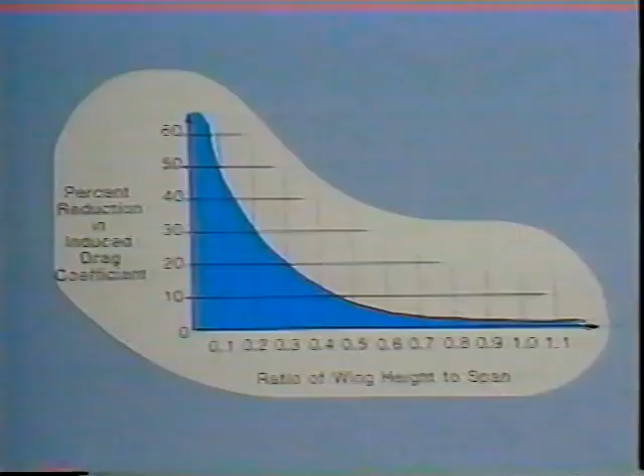If there is no cushion of air, how does this happen? The vertical movement of air around a wing disturbs the air at a considerable distance from the wing surface. The vertical distance from this disturbance is roughly the span of the wings. Suppose that your plane has a span of 36 feet and that you're flying that plane 36 feet above the ground. The downwash should have some effect on the blades of grass below you.

By descending even further, something has to happen to the downwash. It flattens out because it has no place else to go. The closer to the ground you fly, the more restricted are the vertical velocities behind the wing. At wingspan height, you will lose about 2% of the induced drag.

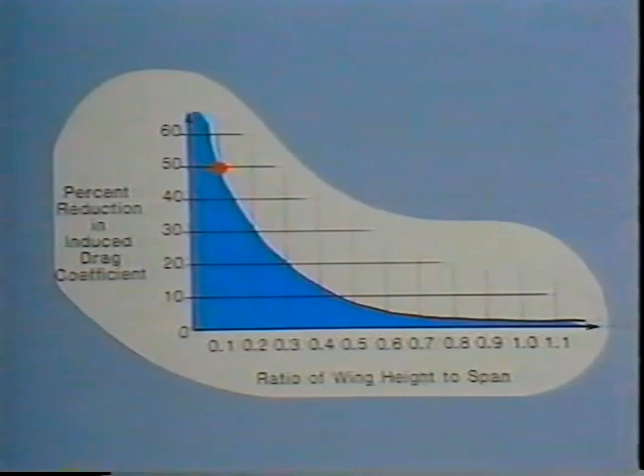At half the wingspan, you have eliminated about 8% of the induced drag. When you get down to a quarter of the span, you will have eliminated nearly a quarter of the drag. At touchdown, you will have gotten rid of as much as half of the induced drag. Parasite drag, of course, is hardly a factor at speeds we are talking about.

All aircraft encounter ground effect, but it is obvious that the effects will be a little greater on low wing types. However, the difference in location of wings doesn't have a large effect, and the suggestions for flying in and out are similar for all types.

We all can remember those student landings when you had everything set up and ready for the flare. Then suddenly the plane ballooned up, the nose pitched down, and you floated and floated. You probably had a little excess speed when you entered the ground effect. With less drag to slow us down, we used most of the runway. No touch and go on that one.

If you had a good instructor, he would have taken the time during the taxi back to explain why you had used so much runway.

I haven't mentioned the tendency for the nose to pitch down in our earlier explanation of ground effect. Planes are designed to be slightly nose heavy. The downwash affecting the horizontal stabilizer is used to counteract this nose down pitch. The purpose of this is for stability, which will be discussed more fully in another presentation in this series. We know then that it is necessary for the horizontal stabilizer to have the downwash in order for it to be effective. In ground effect, the downwash is diminished, allowing the nose to pitch down.

This means that upon entering ground effect, you will have to use more elevator. A full stall landing will take considerably more elevator than a normal power-off stall at any altitude.